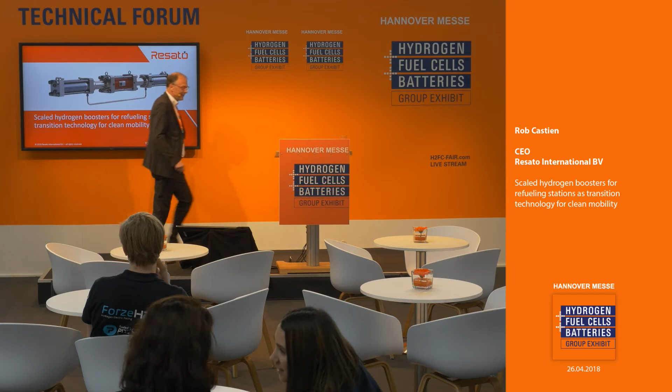Thank you very much for your very kind introduction. We're also very happy to be here at the Hydrogen Forum. And we're also very happy to see that the basic color, everything around here is orange, which is of course the Dutch national color. And tomorrow it's King's Day. Our king is celebrating his anniversary and everything is in orange. I think it's a charming offensive of the Germans to make us the 17th Bundesländer. And then we will be Weltmeister Fußball one day.

All right, so let's get started. My name is Rob. I've been kindly introduced, so we can skip this. And we will talk a little bit about hydrogen at Resato and how we can jointly develop a new hydrogen economy so we can give a green planet to our kids.

Okay, so what do we do at Resato? We are a high-pressure company. And we can make pressure in liquids up to 10,000 bars and in gases up to 5,000 bars. We make safe systems, we design so we can meet the customer needs so they can actually improve their business with our high pressure technology. And we make standard systems like water jet cutting machines, but also tailor-made solutions.

So here you have some examples: a water jet cutting machine, oil and gas testing systems, hose testing systems, everything that has to do with high pressure technology. But also now, since 2 years, we got into the hydrogen. Of course, hydrogen is high pressure as well when you refuel cars. And we still have a lot of challenges ahead of us together. But we want to make refueling of cars and other vehicles much easier and in a transitional manner.

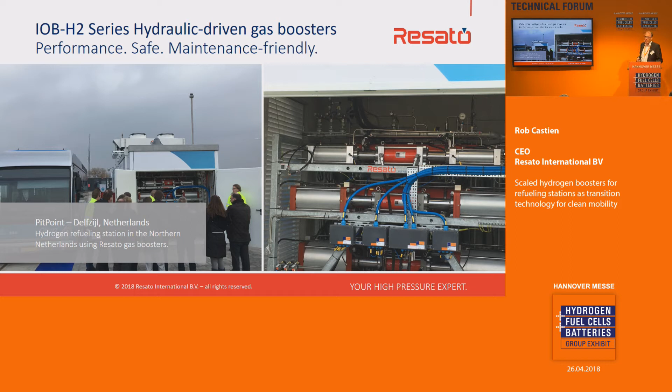Okay, so how can we develop a green hydrogen economy altogether? It's a necessity. I think everybody should be convinced with the Paris agreements, things that are going on in the world, we need to change. And hydrogen is going to be playing a key role in that. So what does the consumer need? He needs a car, and there's some really nice cars outside from Honda, Hyundai, Toyota that you can drive around. We see a nice Mercedes here on the stand. Don't know when we can get that one, but it certainly does look nice.

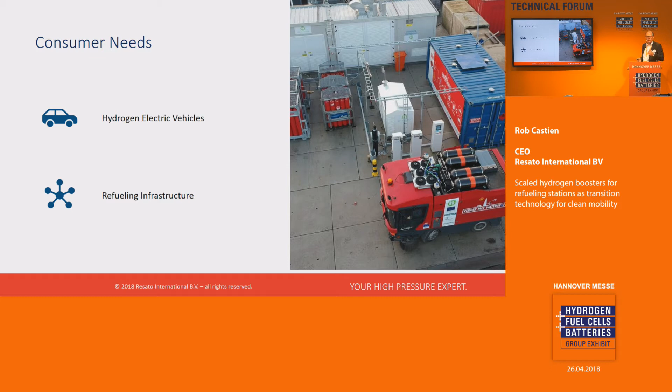So we need vehicles. But as a consumer, if I need a vehicle, I would like to get some hydrogen in it every now and then as well, right? Otherwise I cannot drive around. So these are the two main things that the consumer needs. You need a car and you need to refuel. But then, if I operate a multi-million euro refueling station and there's only 5 cars that I'm serving in my area, this becomes a really, really expensive proposition.

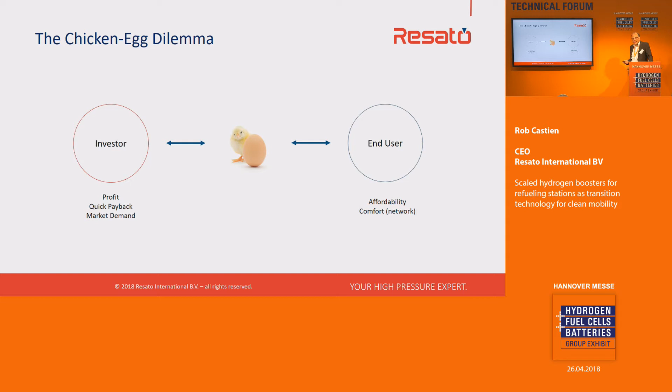And in Germany, the initiatives have been taken to put out an infrastructure, but in many other European countries, this is not the case. There needs to be a business case before people do it. And the end user is saying, well, if I cannot refuel my car, I'm not going to buy it. So it's the chicken and the egg dilemma, and that's something that we feel we need to break by working with transitional products.

So what we figured is that if we have a mother station, for instance, where I have a big electrolyzer that needs to be running continuously to be efficient, if I have a big station, I produce my hydrogen there, or I get it from some other source, I can refuel cars and I can justify maybe in a certain area one big station where I serve multiple cars.

But in many cases today I will have a surplus of hydrogen that I produce locally or I have locally, and what do I do with it? It's not efficient to stop and start the electrolyzer all the time. But what if I can buffer this and I bring it to daughter stations, smaller stations that are within transportable reach of the mother station? Also, these smaller stations should then be at a fraction of the cost, the capital expenses and operational expenses. And that's the concept that we developed.

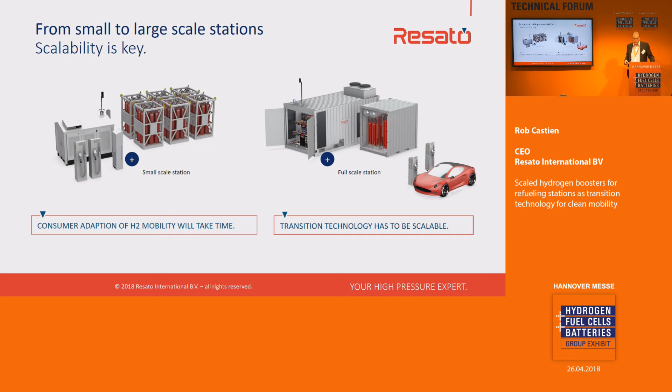So here's an example of how things could be scalable. For instance, you start today with a smaller operation, and you have a bottle supply because you cannot justify the installation of the electrolyzer, it's not running all the time. So you come in, let's say, initially at 200 bars and you lower the bottles until 50 bars. So I'm running my system, I pump it up, I buffer it, and I have a dispensing module, and my business model is I will only refuel PKWs, so cars, and no trucks or buses.

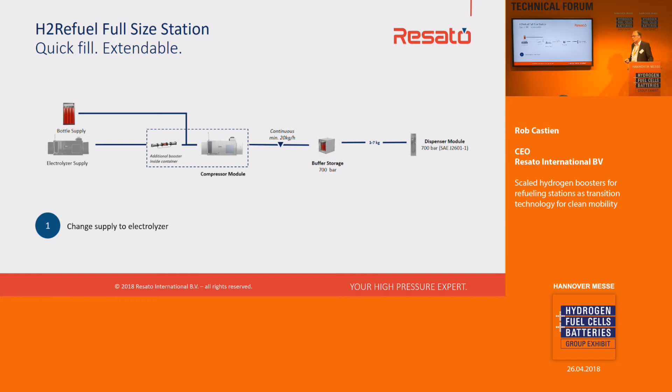But at a certain point in time, business is going so well, I decide I'm going to install an electrolyzer. Now suddenly my supply pressure is going lower. So what you can do in our approach is that you just add a module that is already foreseen in the container. Call it a pre-compression module. I have an electrolyzer, I come out with lower pressure, I need one pre-compression stage, and I can reuse the rest of my installation. It's all ready for that.

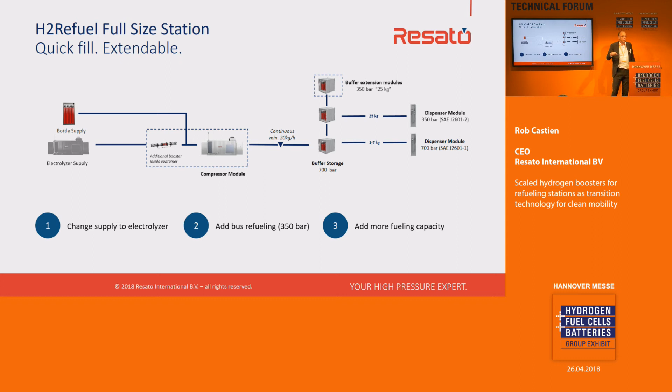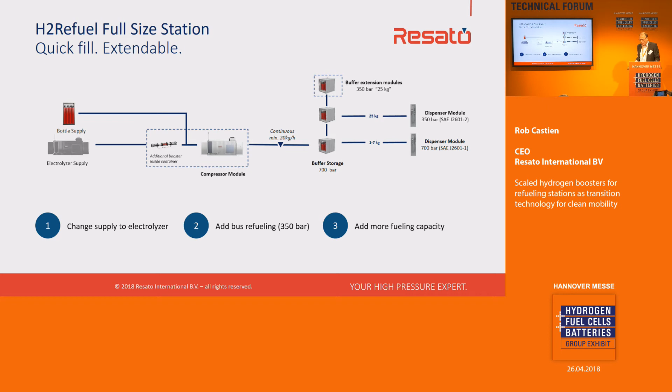And the next step is I decide I want to refuel some buses. So what I do is I add a second dispensing line, a middle pressure if you want, a buffering module, and now I can refuel buses. But the local bus company decides to buy another couple of buses, and I want to further increase my fueling capacity. I can just add another module so I can refuel more buses. And in this way, I can get started with a lower capex, capital investment, and then grow with it as the demand in the market is growing. And that will make my business case much better.

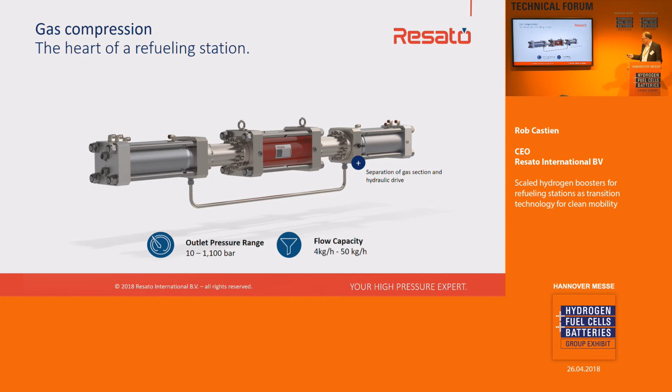All right, so that is about the system approach, but also in our product, we have a modular approach. These are our hydrogen boosters, designed to have no contamination between oil and the hydrogen. Very important to protect the fuel cells in the cars. And these are some of the data that you can see here. We have compressors that go from 4 to 50 kilograms per hour, from 10 to 1100 bars. Today we have a testing system running at the Kiwa in the Netherlands. They test automotive parts at 1100 bars, 1.5 times the operating pressure, and it runs 24/7 at 20 kilograms per hour. So just to give you an idea of what we do today.

So this is an important part, but also a modular approach. So what we do is, the hydraulic drive is always the same, and I can have different compression heads mounted onto my compressor drive.

So what that allows me to do is I can configure the compression system today for what I need today. For instance, I have a slow fill installation. I can have a medium pressure or a low pressure section and a high pressure section. But tomorrow I need more capacity and I can make changes to that. So

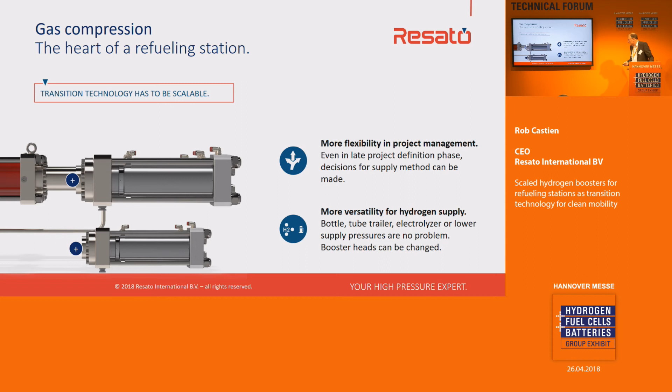let's look at a certain use case. I'm having a bottle supply today and I'm coming in with 50 bars and I want to get out at 950 bars to refuel my cars. I need 3 compression stages. From 50 to 180, from 180 to 550, from 550 to 950.

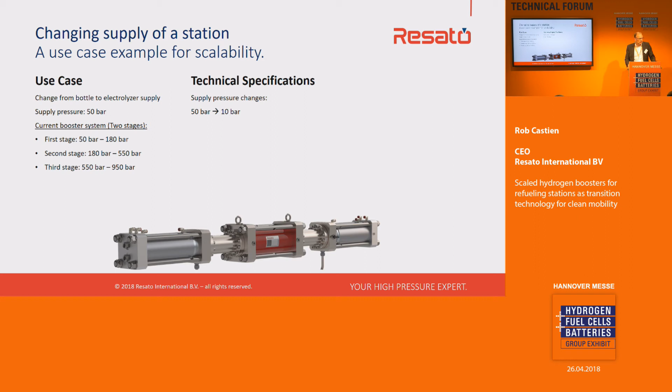Okay, so then the inlet pressure is lowered because I'm starting to use an electrolyzer. So now I cannot use the same compressor setup anymore, or I have a lower capacity. So what do I do? I just add one stage to the system, and I have a first compression stage from 10 to 50 bars, and then the rest of the installation remains the same. So I only have one additional booster, and I don't lose any capital investment that I've done previously. And with this modular approach, we can really grow the business together.

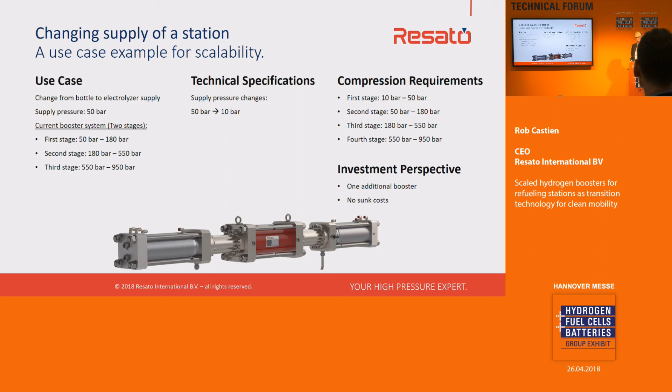Another situation that you could have, for instance, our fleet owner station is a unit where you can do a slow fill on your own premises with cars or buses or whatever. And it has only one compressor in it with a low pressure section and a high pressure section. But you can imagine that as the business grows, I want to double the capacity. So instead of buying new compressors, what I can do is I can take the head of my initial compressor, put it on this compressor, and then I just buy an additional compressor to do this.

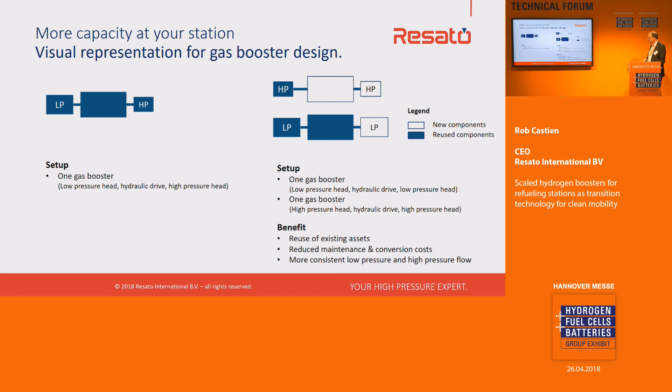So your investment is protected. Your investment of today is protected for tomorrow. And that's also a very important thing to do. So it's all about the initial design, making systems modular so people can grow with the technology and the demand in the market. Okay.

Just a little bit about Resato. We're a high pressure company, that's our core competence. We do different stuff with it, water jet cutting machines, high pressure test systems for oil and gas, all kinds of applications, and also hydrogen today. We're located in the Netherlands, 85 people, 20 million turnover. We're growing rapidly, and we go up to 200,000 PSI. This is for the Americans that still have not learned to recalculate the numbers. All right.